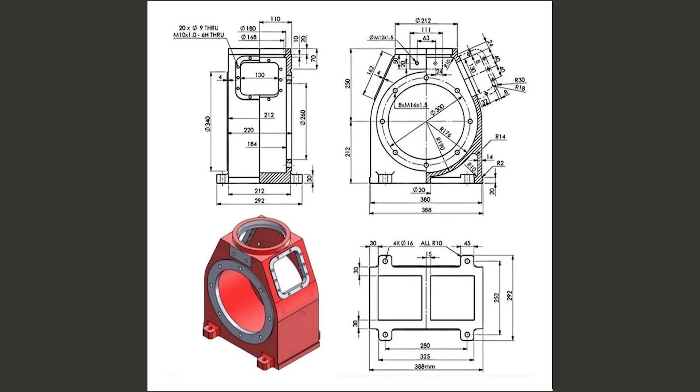I was dreaming in my sleep, now wide awake. With CATIA by my side, there's no mistake. Always had a wish to create and design. Now I'm building futures one line at a time. Could sketch a ship or design a plane. With CATIA, every dream I can sustain. Stay with me, I'll show you how it's done. Our journey to the stars has just begun. Dreams with CATIA come alive, stay tuned. In a world of possibilities, our talents bloomed. From the sketch pad to reality, watch us soar. With every click and curve, we crave for more. From the smallest bolt to towering steel, with CATIA, our thoughts become real. Together we'll create wonders to see. In this world of design, just you and...

Hello everyone. Today we want to draw this part together. You know this CATIA environment, called the DMU 2D viewer. This part is a gearbox casing. In drawing this part, we will use two tools: positioned sketch and Boolean.

The overall drawing is simple. The only important point is drawing the inner hollow cylinder and connecting it to the outer body. First, we will examine the part.

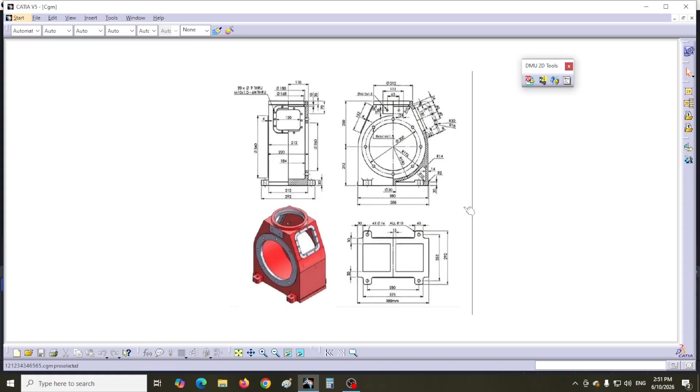The part has a trapezoid shape. On its side surface there is a hole with a diameter of 260 millimeters.

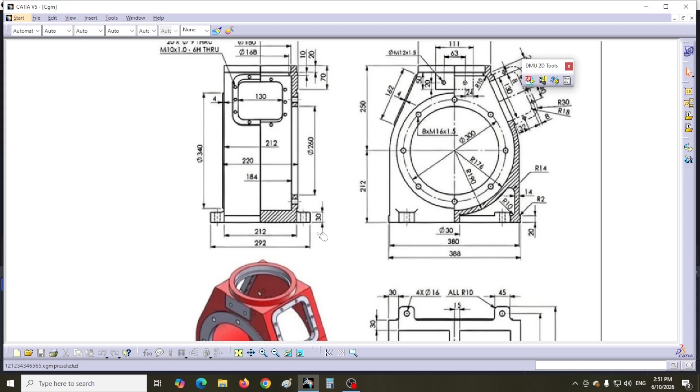First, we must find the best point on the part to use as the coordinate center. I choose the center of this hole and the middle of the part as the drawing center. I also consider the vertical and horizontal axes.

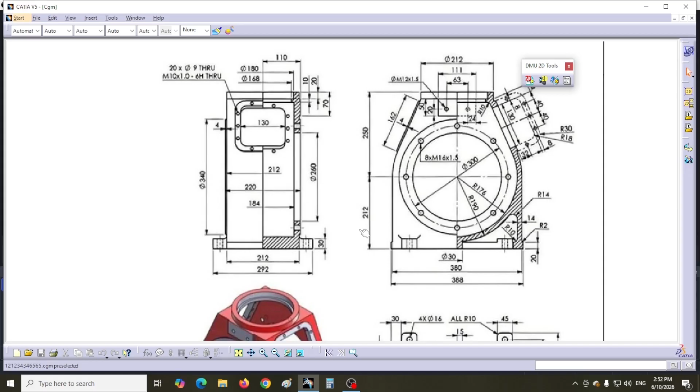To select the sketch plane, I pay attention to its 3D shape. Based on the view direction, I select the YZ plane as the sketch plane. With this plane, I enter the sketch environment.

First, I draw a circle with a diameter of 380 millimeters. I place the circle center at the coordinate center.

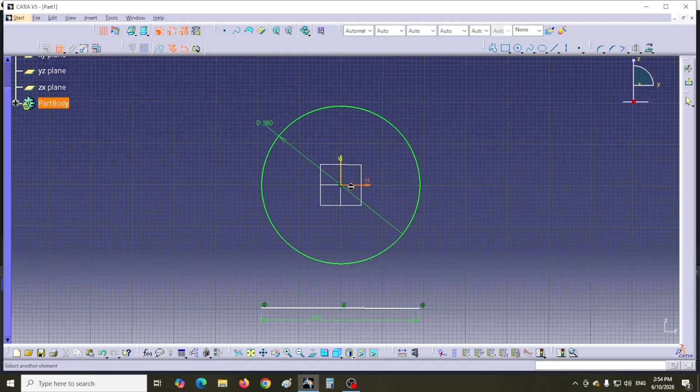I draw a horizontal line below it. I make the line symmetric to the vertical axis. I set the line length to 380 millimeters. I give the line a distance of 212 millimeters from the horizontal axis.

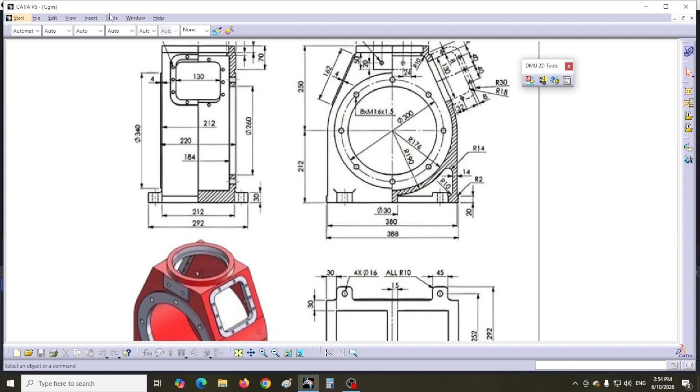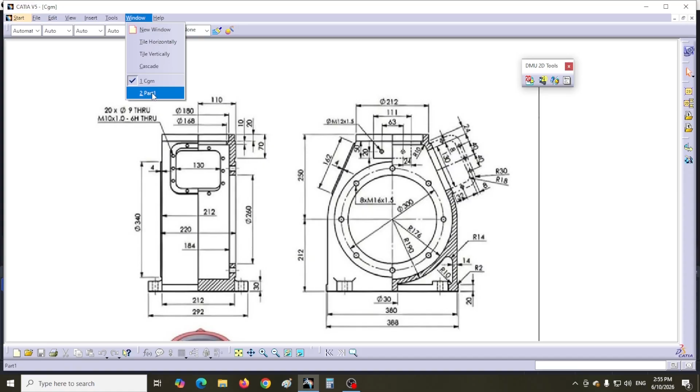I draw a horizontal line above the circle. I make this line symmetric to the vertical axis. I set the line length to 212 millimeters. I give the line a distance of 250 millimeters from the horizontal axis.

Now using the line command, I draw 4 lines. Each line connects to the end of one of the horizontal lines and is tangent to the circle.

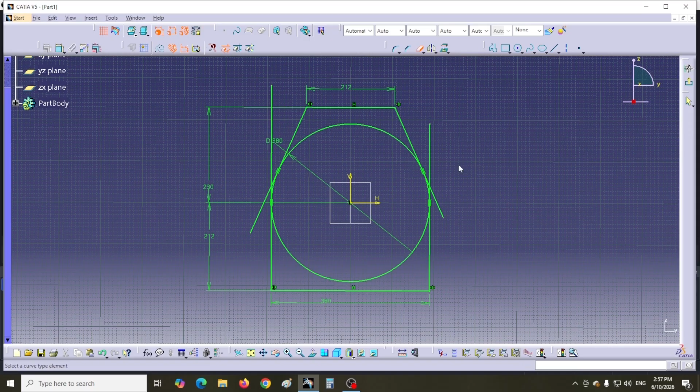I activate the quick trim command. I delete extra parts. I use the analyzer tool to check that the drawing is correct.

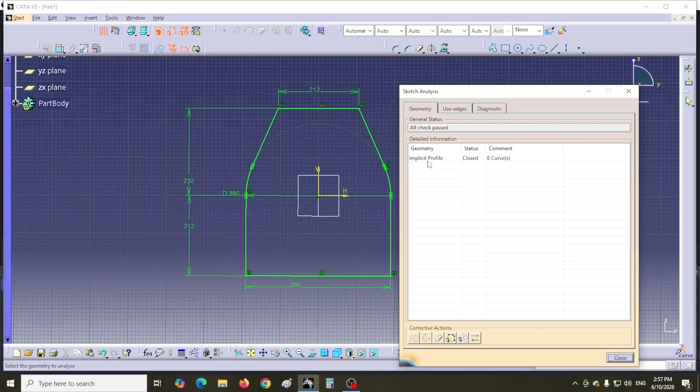With the sketch made, I return to the part environment. I activate the pad command. I extrude the sketch symmetrically from both sides by the needed amount.

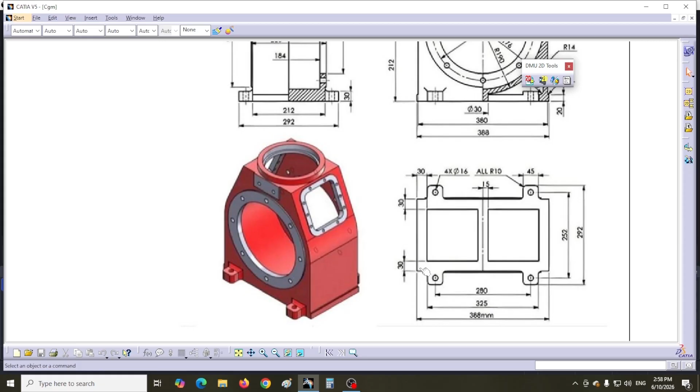Now the body and rough shape of the gearbox are created. Notice that the gearbox casing is hollow. The thickness of the body varies in different places.

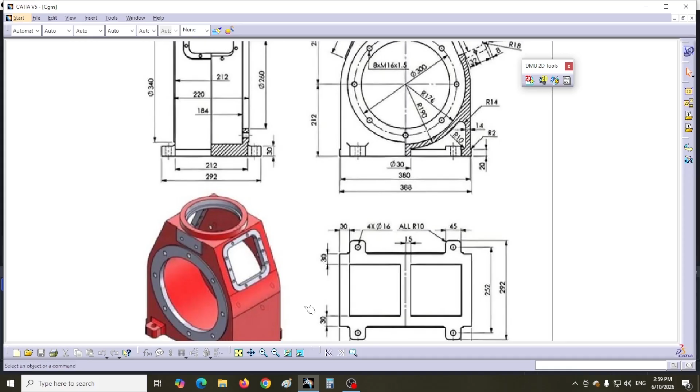The body thickness on the sides is 14 millimeters. At the bottom it is 20 millimeters and at the top it is 10 millimeters.

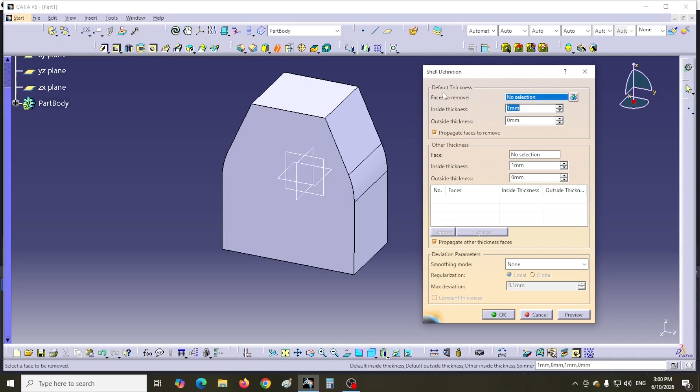But we have a tool that allows us to have the part as a shell with different thicknesses. This tool is called shell. I activate this command. In the first part, for default thickness, without clicking on the part, I enter the number 14 in the thickness field.

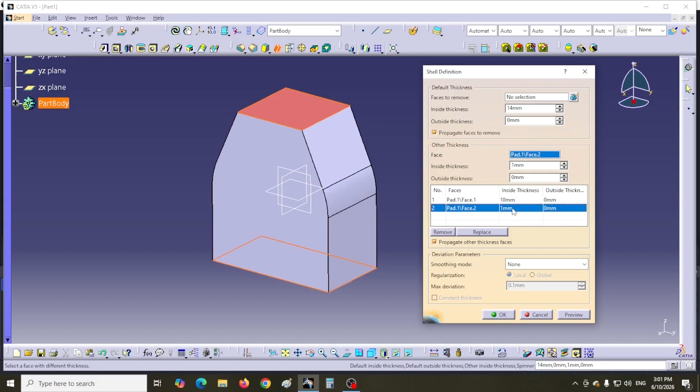In the second part, for other thickness, I click on 2 surfaces with different thickness. In the window for this part, the names of the 2 surfaces appear. I click on each of them until they turn blue. Then I enter the desired thicknesses in the thickness box. I click OK in the Shell Tool window.

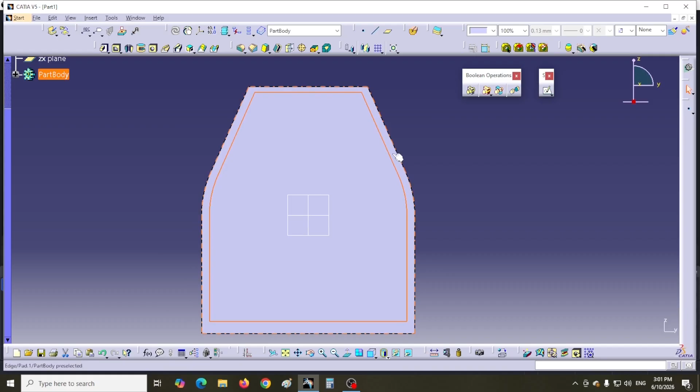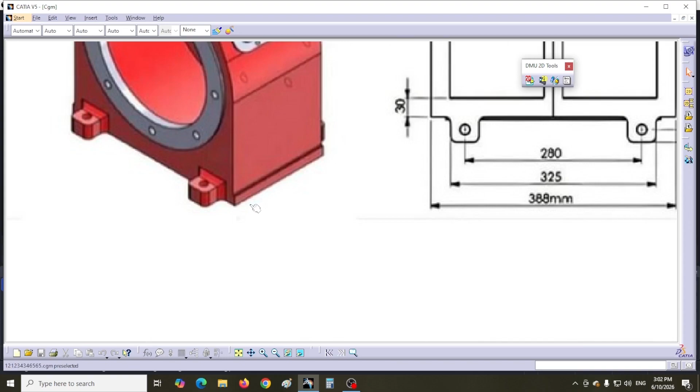I activate the sectioning tool. I select the appropriate plane. The inner parts of the shell become visible. Now I make adjustments. First, the lower edge on each side has a 4 mm protrusion. I create that.

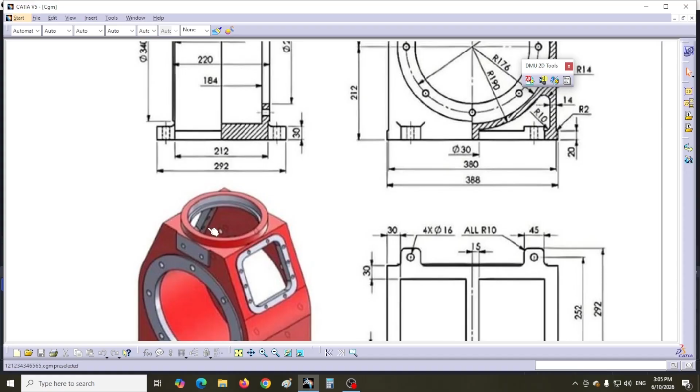Then I create a hole on the top surface of the gearbox with a diameter of 168 millimeters.

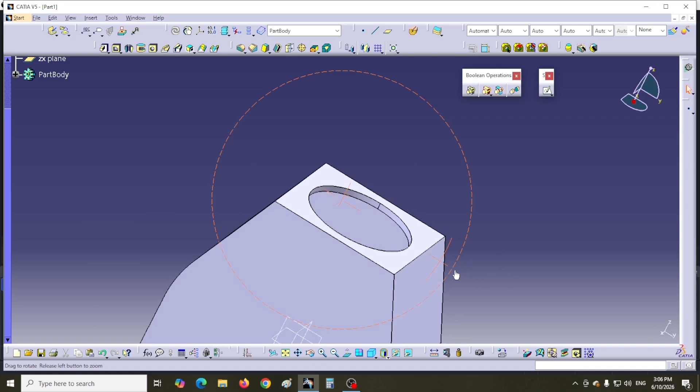Next, I create the square holes at the bottom. Notice that the holes are 30 millimeters apart from each side.

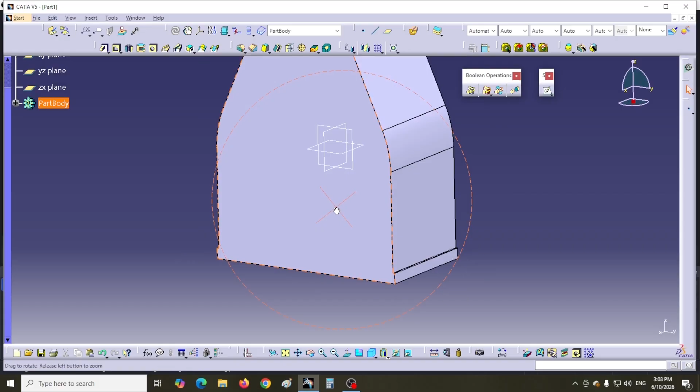After that, I create the side holes with a diameter of 260 millimeters.

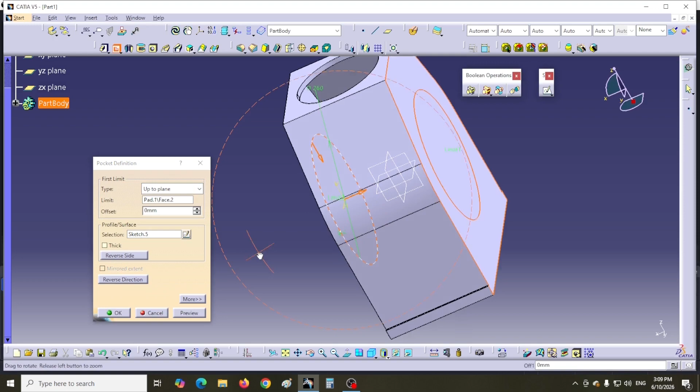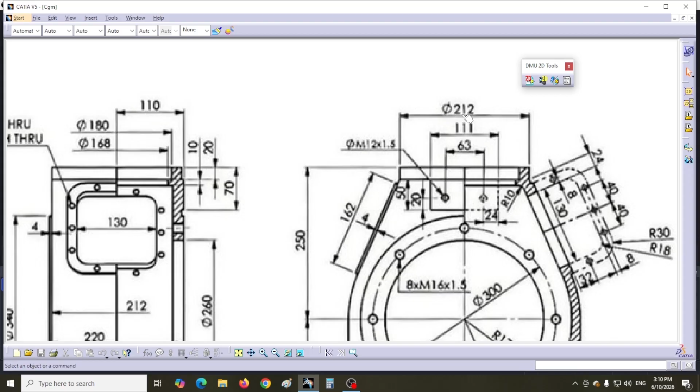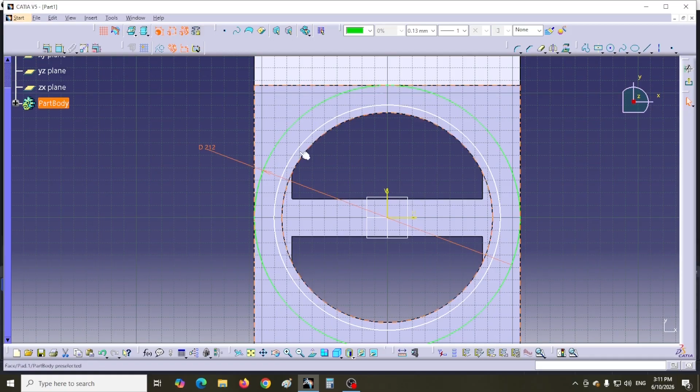Now I draw the hollow cylinder on the top surface of the shell. I use the pad command for this.

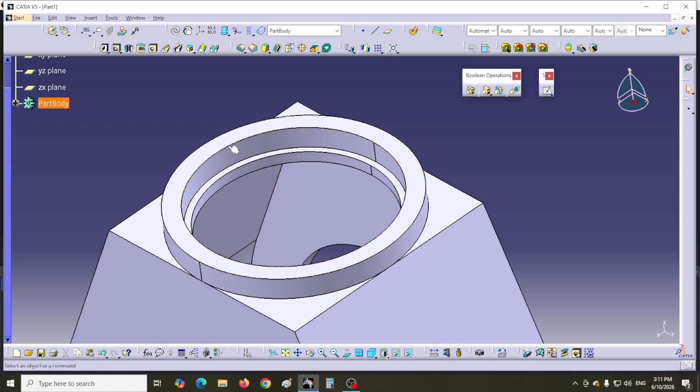I create the square holes on the side surface by defining a specific sketch plane. First, I activate the positioned sketch command. I explained this tool in detail in lesson 30 in the part environment.

The tool settings window opens. In the planar support section, the positioned option is active. In the reference section, I click on the side surface.

In the origin section, I set the type to intersection of two lines. I select the two side edges of the part. At the bottom, I activate the reverse V option.

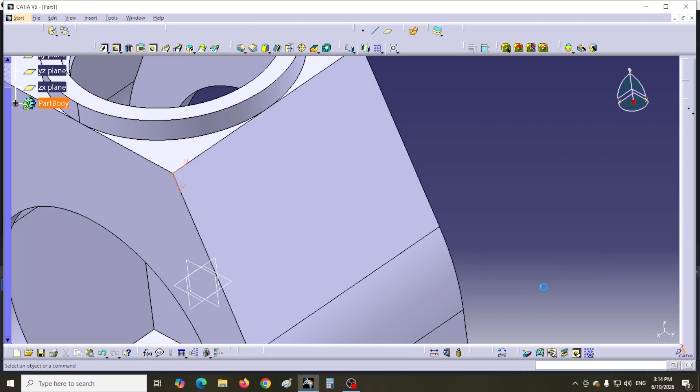Finally, I click OK. You can see that I go to the sketch plane, but here the horizontal and vertical axes are created based on my settings. If your view direction is reversed, click once on normal view.

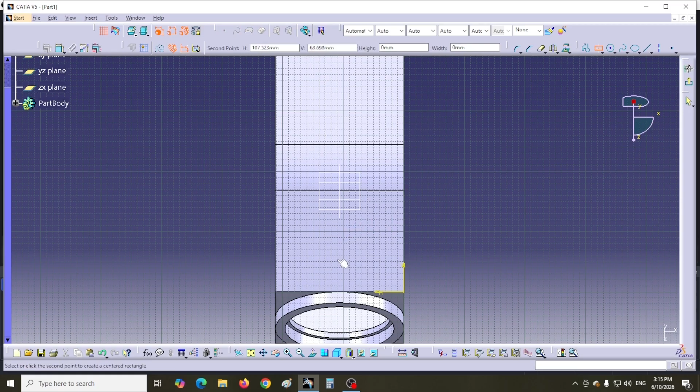Now I draw a square, set its size and adjust its position.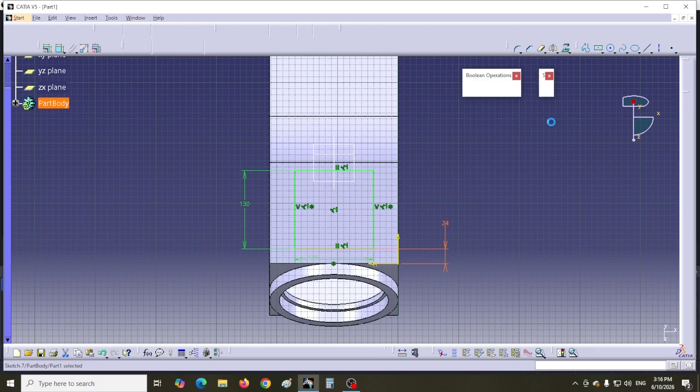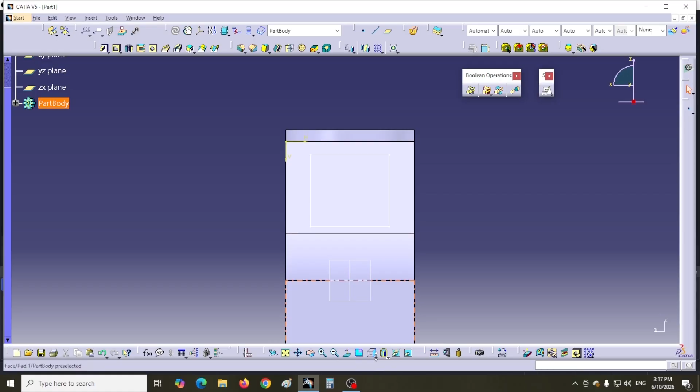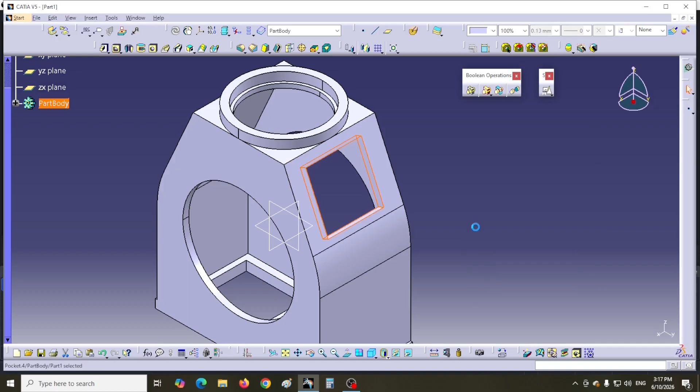I return to the part environment. Using the pocket command, I cut the gearbox shell. I make the pocket symmetrical.

Now I draw the raised edges on the side.

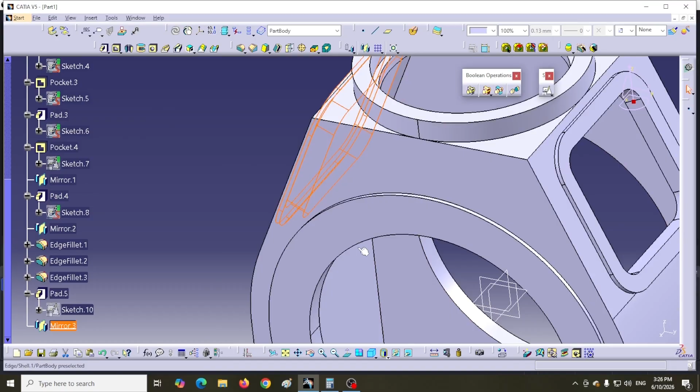I create the 4 gearbox feet and apply fillets.

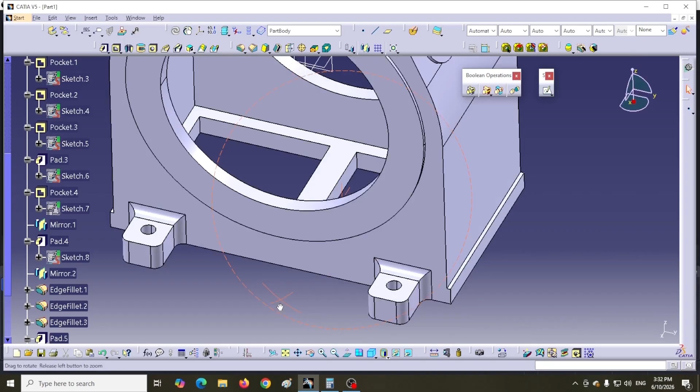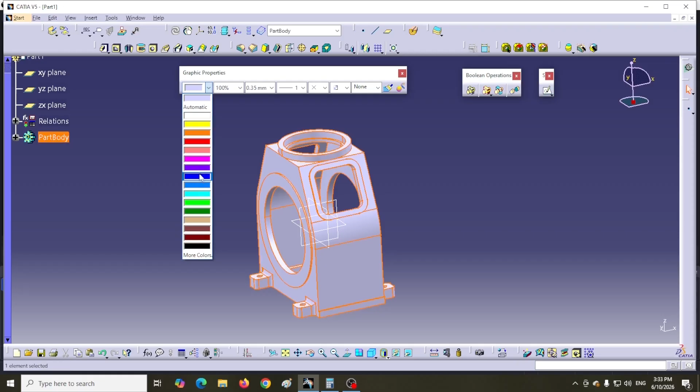Here, the gearbox shape is almost finished. The only remaining part is an inner half cylinder. The inner and outer radii of the half cylinder are 176 mm and 190 mm, and its height is 184 mm. I draw this half cylinder in a separate body.

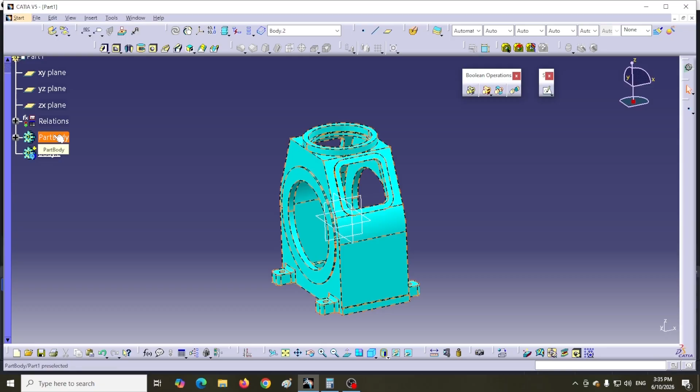From the menu bar, I click on Insert. In the opened menu, I select Body. A body is created separately under the part body.

If you notice, you should see a line under this body. This line shows that the current body is active. I put the mouse over the part body.

I right click. From the open menu, I select Hide/Show. The part body is hidden from view. Note that the body is active.

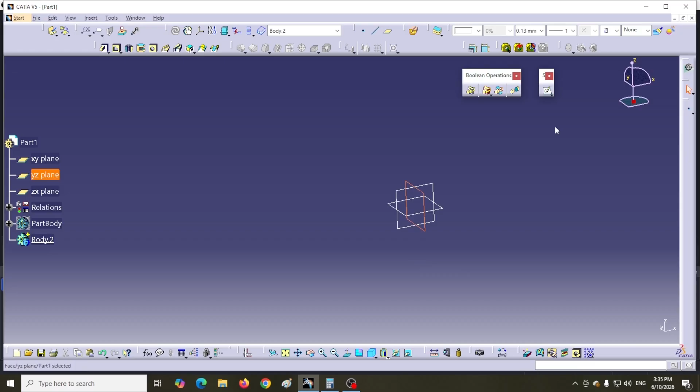Now with the same YZ plane, I enter the sketch environment. I draw two concentric circles at the center of the coordinate axis.

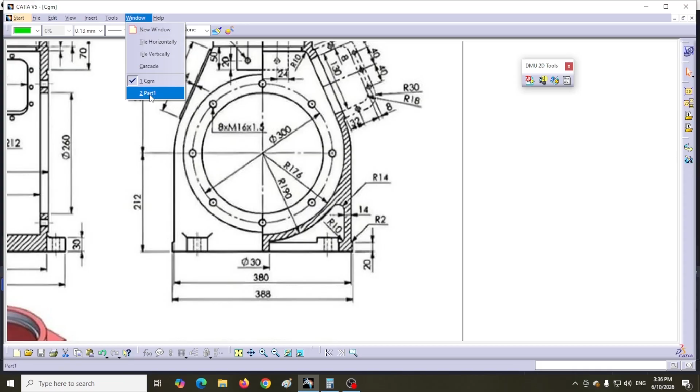The larger circle has a radius of 190 mm. The smaller circle has a radius of 176 mm.

I draw a horizontal line. The line passes through the middle of the circles. I erase the upper part of the circles.

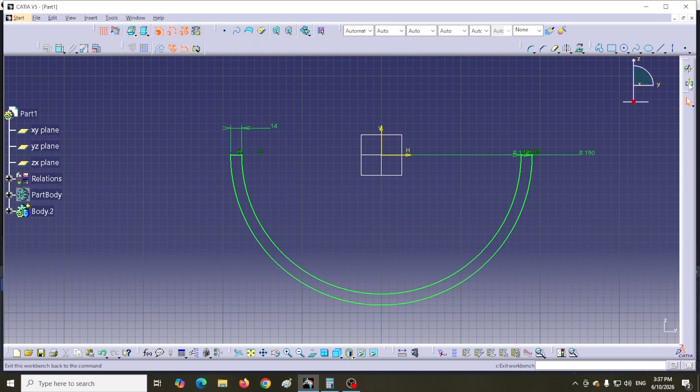I return to the part environment. Notice that because the two half circles were drawn in one sketch, they are recognized as one sketch. This is an important point.

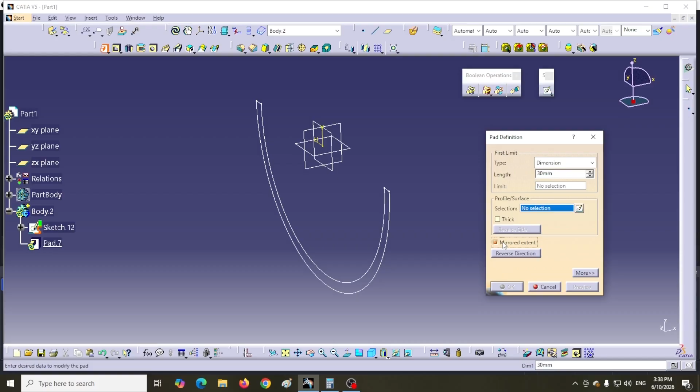Using the Pad command, I extrude the sketch symmetrically from both sides by 92 mm.

Now I right click on the part body and select Hide/Show again. The gearbox body is visible.

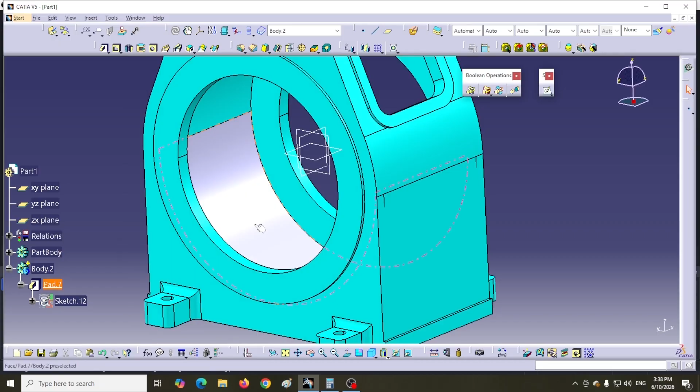Now I click the Assemble command in the Boolean toolbar. In the first box labeled Assemble, I click on the body in the tree diagram. In the second box labeled To, it shows the name part body. I click OK.

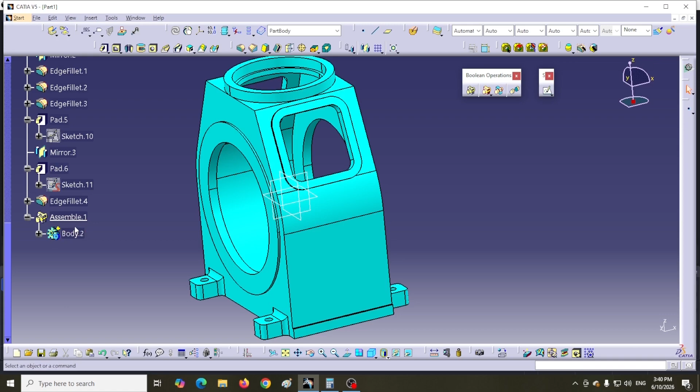If you look at the tree diagram, you will see that the name of the body was removed from under the part. Now this name is inside the part body. The part drawing is finished here.